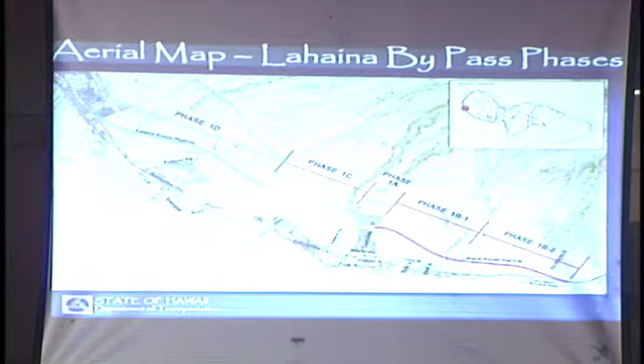As was mentioned earlier, Bob Pure is also the executive director of the Lahaina Bypass Now group. Without their help, this Lahaina Bypass Now project, well, the Lahaina Bypass period, would not have even started. So I don't know if some of you came to the meeting last year, we pretty much updated you on what was happening. And basically, this is the Lahaina Bypass project.

I guess you cannot see the pointer very well, but if you've been up to Lahainaluna Road, you'll know that the first phase of the Lahaina Bypass is in progress. That's the section between Lahainaluna Road and Keawe Street. Keawe Street is the street that goes up to the Lahaina Gateway Shopping Center, across the Lahaina, Mauka of the large shopping center at the bottom. And then we also have another phase that's already in progress, which hadn't started, I think, as of last year.

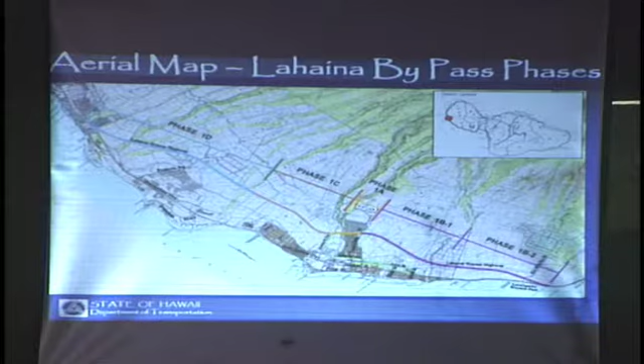And we have another phase, which is, I guess it's kind of hard to see this map, but this is Lahainaluna Road over here. And then the next phase goes from Lahainaluna Road back to Hokiokio Place, which is that road that's between Front Street Puamana and Puamana Beach Park that goes Mauka. It's just a small dead-end road, but that's going to be a temporary connector.

So right now, just to go over, Phase 1A is in progress, the one from Lahainaluna Road to Keawe Street. We basically broke ground way back in 2009, and we've been in progress since then. In 2010, we finished the Lahainaluna Road grade separation structure, which if you drive up Lahainaluna Road, you'll see that bridge structure that literally overpasses what used to be Ikena Avenue, that's now excavated about 30 feet below.

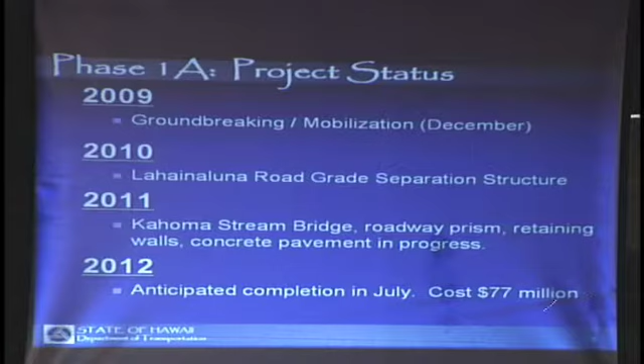And last year, we started the Kahoma Stream Bridge and some of the roadway prism, retaining walls, and concrete pavement, which is still in progress. We expect to complete this project this year in about July. And if you look at that, you see that dollar amount, $77 million. That's only one project.

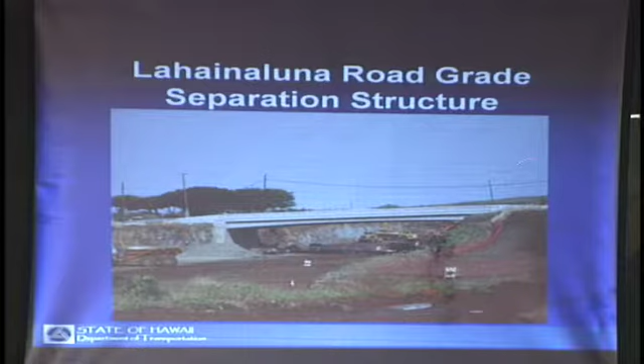Just to give you a little bit of a picture, this is Lahainaluna Road going up Mauka. Ikena Avenue used to go this way, and it used to be at the same level as Lahainaluna Road, if you remember. It's actually excavated now, and the bypass is going to go underneath. This is Kelawea Mauka Park, and this is the Kelawea Mauka subdivisions, just to give you an extent of the size of the project.

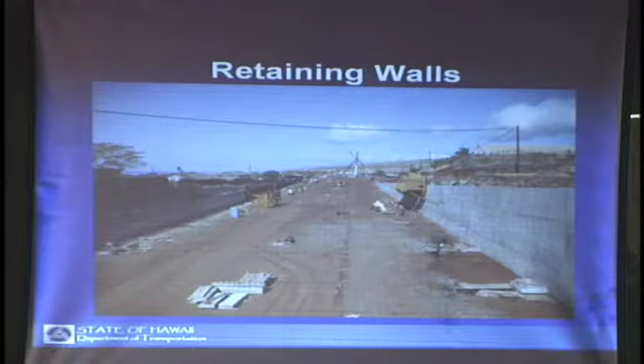Here's another view, this is looking towards Ka'anapali. This used to be Ikena Avenue, and you can see the houses up here, and then Kelawea Mauka Park here, and this is how much it's been excavated below, and these are the retaining walls that are being constructed. Further down towards north, this is looking the other way, towards Olowalu. This is the mountain, this is the Kelawea Mauka subdivision.

And this is the Kahoma Stream. We have this huge Kahoma Stream bridge structure that's under construction. It looks kind of large right now, but you see all this stuff underneath? This is just called false work, it's going to come off later on. The actual bridge is on top here. It's partially complete. They're going to have some girders that go on top, and then the roadway surface is going to be put on.

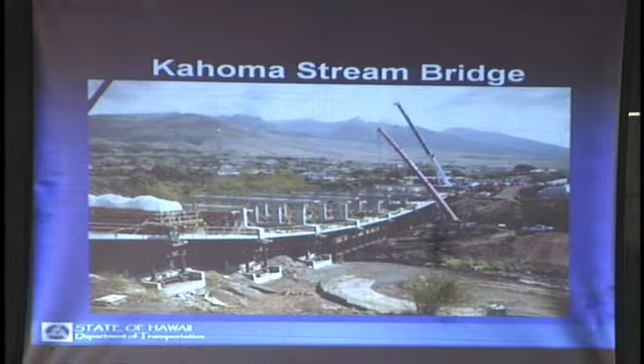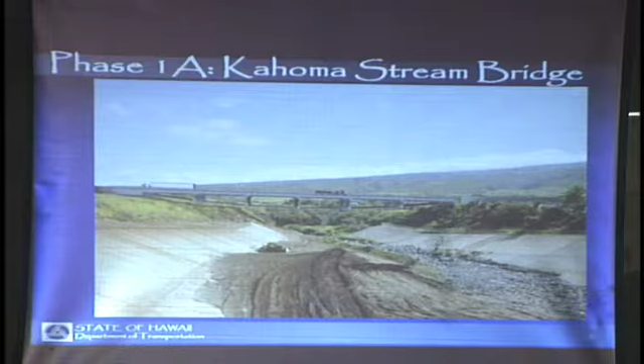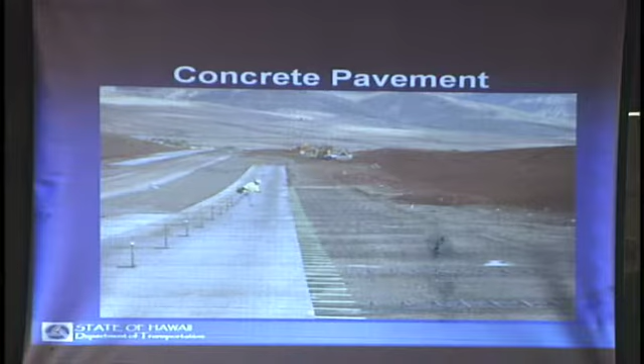And this is an example, looking back towards Olowalu again. It's going to be concrete pavement instead of asphalt, because we found that although the upfront cost of concrete is more expensive, over the life cycle compared to asphalt, we're actually getting a better bang for our buck.

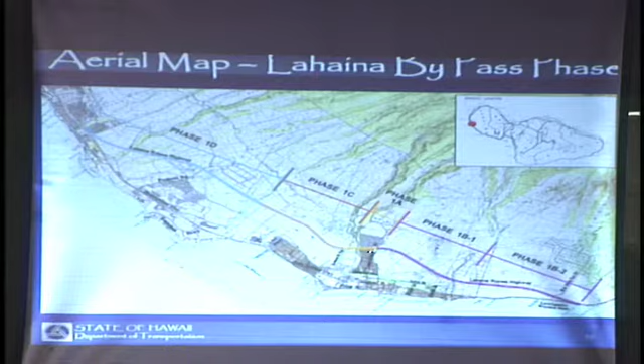I'm going back to this map again to give you a perspective of the next phase, which is Lahainaluna Road to Hokiokio Place. This is the status as of now. We broke ground in November of last year, and in 2011 we pretty much did mass grading, some culvert crossings, and a small bridge crossing. So there's not much to see right now.

If you drive up Lahainaluna Road and look north, you'll see phase 1A. Look south, you'll see what we call phase 1B1. That's also expected to be completed in July. And again, look at that price tag — $24 million. So you kind of do the math in your head so far.

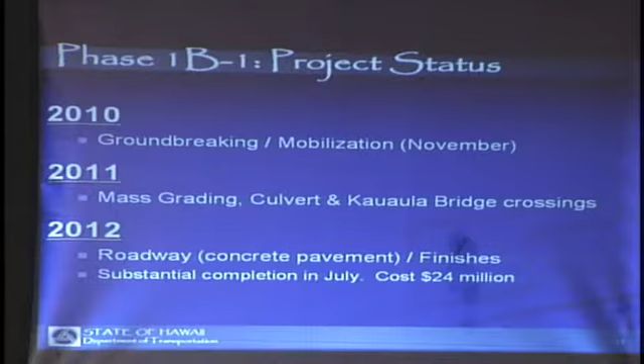And I've only covered 2 projects so far. Because it's also going to be complete in July, our plan is to really open up 2 phases at once. If you recall, when the state did the Mokulele Highway widenings, we had 5 phases, and the last 3 phases we opened all at one time so we didn't have to disrupt traffic doing transitions in between the phases. That's our hope, and I feel that's going to be a real big benefit to the public to get some traffic off the main corridor.

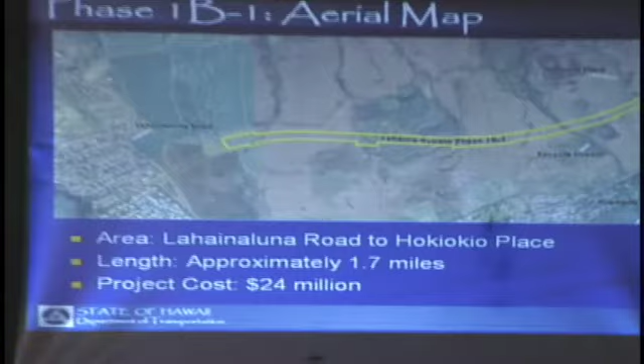Because there's not much to see right now, this is just an aerial map of the limits of the corridor. This is Lahainaluna Road, and this is Hokiokio Place. You can see this is Puamana. I guess not many of you might have noticed there's a Kauaula Stream Bridge in front of the Puamana community — it's just past that.

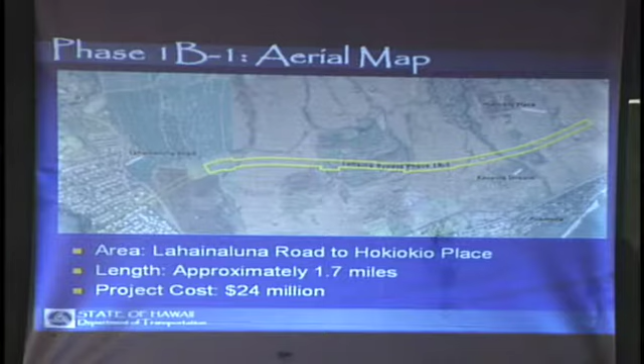The project will also include — oh, here we go, my light is out again — okay, this is the south end of phase 1B1 of the bypass, Hokiokio Place. We're going to improve Hokiokio Place to be able to carry a little bit more traffic, and then we're going to signalize the intersection down at the existing highway.

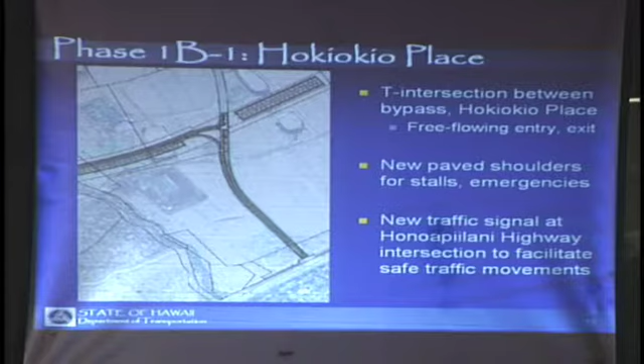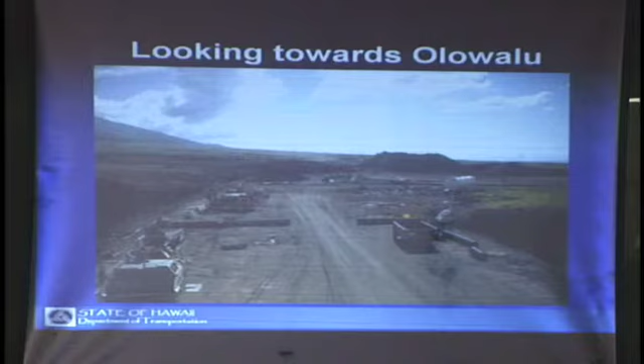This is just a little bit of the next phase. Here are some photos — you cannot see much. This is standing on the Lahainaluna Road separation structure looking towards Olowalu. Not much to see because it's only a lot of underground work. The biggest thing going on structure-wise is an arch agricultural crossing, and as we speak, they're setting all these arches on.

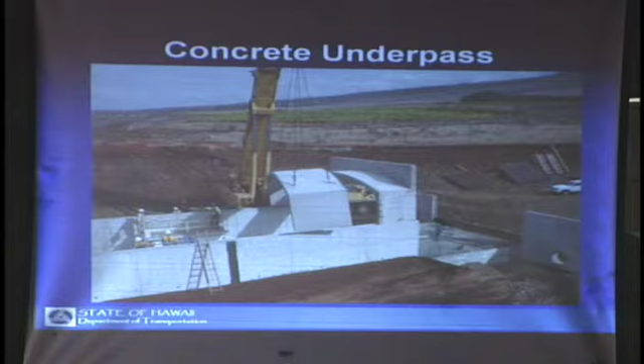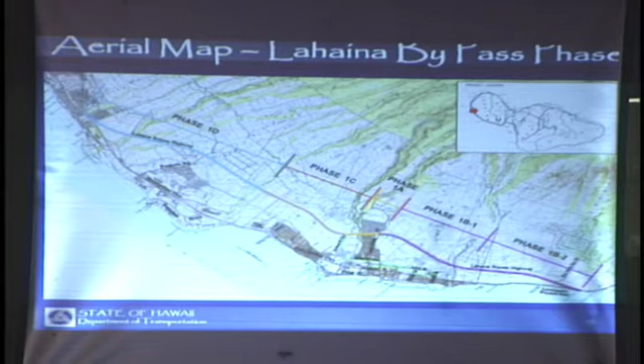Getting back to the map again, just to give you a perspective, the next phase we're working on as far as design is what we call phase 1C, which goes from Keawe Street towards Ka'anapali. You can see Ka'anapali down here, so conceptually it's somewhere between the Civic Center and Ka'anapali Parkway. So this is the phase right here.